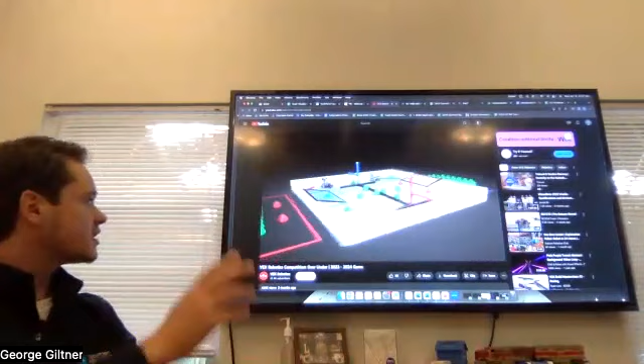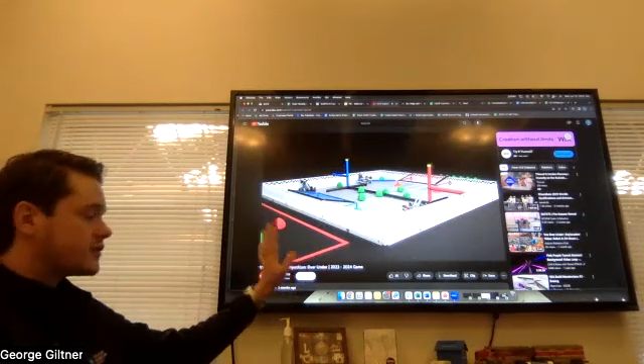You'll want to watch this video with your students at your first practice. This is Vex Over Under, played on a 12 by 12 field. You've got nets on either side, and a dividing tube down the middle. These things are called tri-balls, there's 60 of them on the field. They're going to be green, but each set of teams will have 2 red for the red alliance and 2 blue for the blue. So unlike IQ, where there's only 4 robots or 2 robots on the field, in VRC there's going to be 4. You'll have the blue and red alliance, a blue scoring zone, a red scoring zone, and that divider down the middle.

Like high school, you'll have an alliance partner where you're working with them to score as many points as you can. But you'll also have the other alliance, where you're kind of competing together. We call it coopertition — you're cooperating with your partner but competing against the other set of partners. We'll dive into what each part of the scoring looks like in the PowerPoint.

They're going over the do's and don'ts of the game and where things are on the field. For example, robots can only hold one of these tri-balls at a time. There's a loading stage — we'll talk about that — and those are on the corners of the field. But at the end of the day, the point of the game is to score as many points as possible compared to the other alliance.

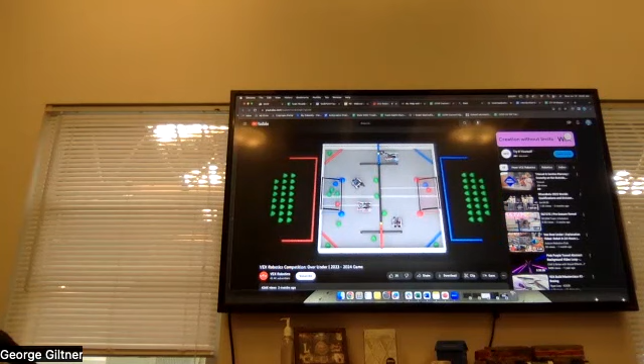There are multiple ways to score — you get points for scoring underneath the net score zone, and toward the end there's a pole you can climb, which I think is interesting as kids try to engineer different solutions. There's also an autonomous period, which we'll break down here. I'll encourage you to watch this video with sound when you get the chance to watch it with your students, but we're going to break down everything in the video.

Robots can go underneath this bar to the opposite side. You'll have a red scoring zone, a blue scoring zone, as well as those nets. Like I said, whoever has the most points at the end is going to be the winner.

As time expires, there's kind of a last chance to get points, and that's where these bars come into play. The way this game works for this year is that the robot that's highest wins the most points, and it scales down from there. So there's a hanging bar — they have this pole that dictates the height of the robots as they hang, and the points are allotted based on what that hanging looks like.

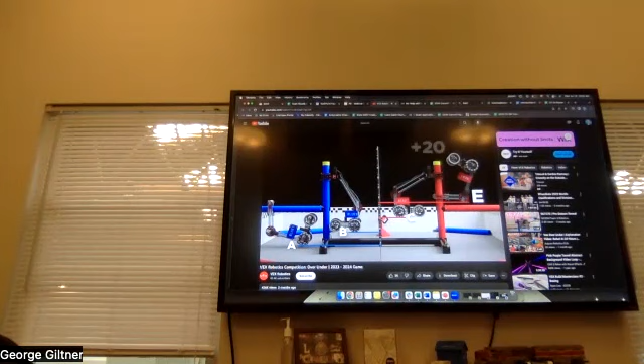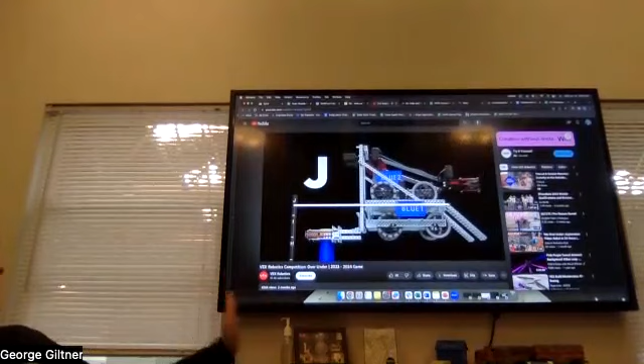So you'll see students come up with crazy ways to hang their robots, and we'll see what judges do for robots that are very close together. But that's kind of the structure of what these games look like.

I'm going to pause here and talk about the last bit of this video. On top of your competition, where you work with your alliance partner competing against the other alliance, there's also skills — basically one robot on the field scoring as many points as it possibly can. Typically at an event, and George will talk about this later, those are off to the side. So if this was like a high school gym, you'd have the fans over there, the competition fields right here, and skills might be back in the corner.

The way we invite teams to the state championship is by skill scores throughout the state. So skills is very important, especially if you have students whose robot doesn't mesh well with other robots, and maybe they get bullied a little bit by the more well-built robots from teams that are more established. So I'd encourage you to do those skills as well.

Any questions so far? I'm sure you have a ton of questions about the game. There's just one right now.

Biz asked what parts are included in the grant for those who received one, which I think we cover later — we do cover it later. To put your mind at ease right now, we'll cover the field, not the tiles — so the field, game elements, and your robot kit. Everything can actually be purchased from Vex. We purchase the kits, and I'll put all the links in the chat.

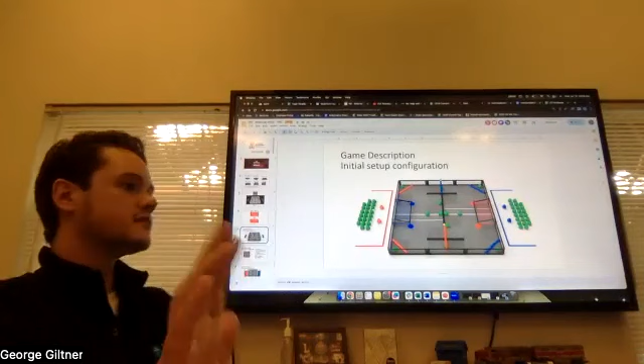Again, your students are going to have questions about the games. You guys have too much on your plate. You don't need to be reading through 113 pages, make your kids do it, they'll know all the answers. But as you can see, it kind of talks about the game, what each aspect of this field looks like, some definitions. Make your kids read this, you do not need to read this. George and I don't even want to read this, and we do VRC more than you guys do.

IQ is like a 30 to 40 page manual. Yeah, you go with the VRC, it's over 100. So there's just a lot of details, and it just comes because each team really tries to find ways to bend the rules, and they just keep having to make them bigger and longer. And what you'll see in there even outlines that at different dates in the season, they'll update the manual because of the loopholes teams find out. So they'll be like, oh I never thought about that, and so they've already made some iterations.

Yeah, it's called a change log, page 4. So you can kind of see they've already, looks like they added a new violation. So as your kids are becoming experts at this, they'll need to go to the change log, see what's new for the month of June. And actually it looks like they've added multiple violations. So kids have already found ways around the rules and they update this.

I don't know when the cutoff for the update is. So if you make it to state, your kids aren't going to be needing to read this right before state. It'll go all the way to Worlds, updates all the way up right before Worlds. I take that back then, they will need to be reviewing this up until their competition at Worlds.

But like I said, your kids will need to read this. You can print it out if you want. I would suggest not printing it out just with these updates, or you can print out everything but the change log and have the kids check the change log online periodically.

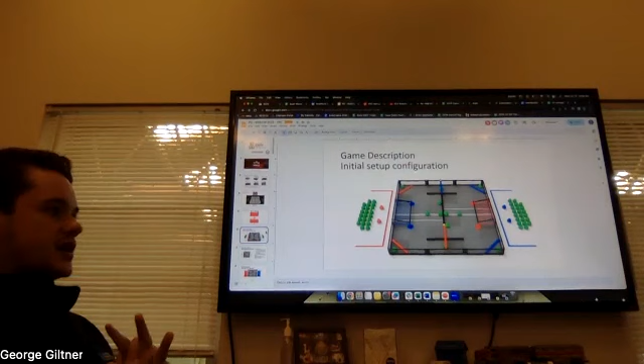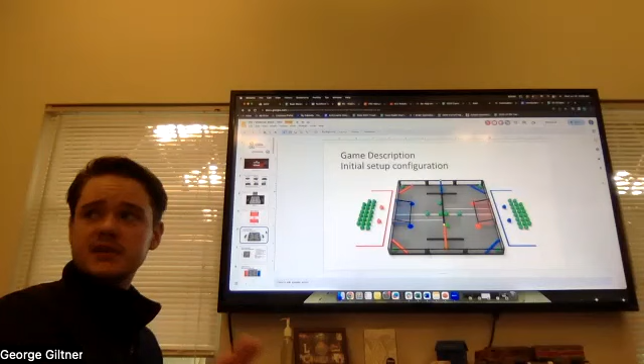All right, so the game. Again, the video does a good job of showing what it looks like for robots to move around, because it's really unique to see four robots move around a field. So again, I would encourage you to watch it. There's also tons of videos on YouTube of really gung-ho teams that have already built their robots, have already set up their fields, and have already started practicing. Again, you're not behind, there's no expectation that you do that, but I would encourage you to go watch those videos to see what it looks like for these robots to be moving around.

But this is the field. I think it was called Over Under. Yep, Over Under, nailed it. And we'll talk about what each scoring looks like and what the field looks like. But you have a red and a blue side. You can kind of see the field, the goals are switched. So this is the red side with the blue net on it, and this is the blue side with the red net on it.

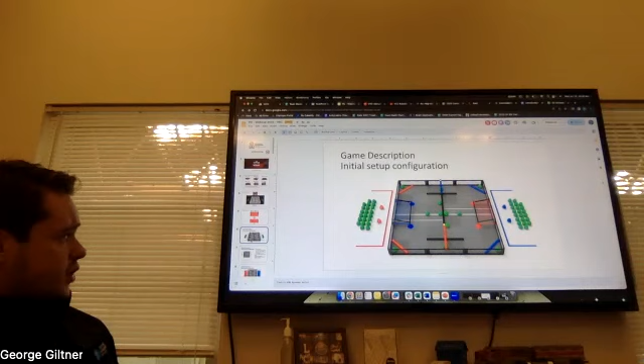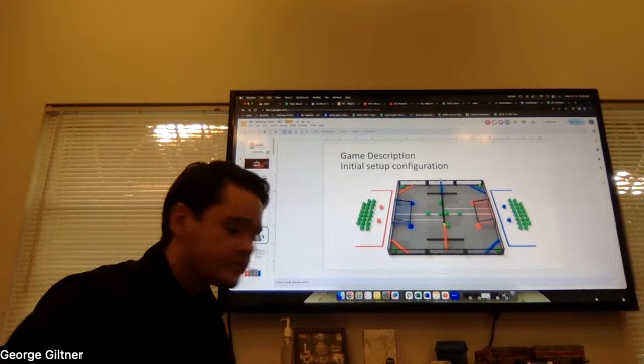You'll have 60 balls. It starts with 12 balls on the field, and then you'll have loading balls that your alliances will put up in the corners. We'll talk about what that means as you load those triballs onto the field. But like the video showed, the point is to move those balls around the field and score them. We'll talk about what that looks like here in a second.

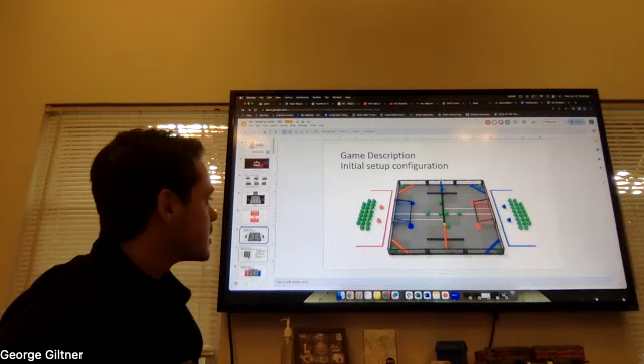So like I said, you've got 60 of those balls. You've got 4 of those alliance triballs, which are going to be kind of the ones at the front. Here, this picture is a little bit better. You've got 2 designated red and 2 designated blue. We'll talk again here in a second why those are important, but those can only be scored in very specific areas. You'll have 44 that are match loads, so these are kind of what these look like over here, which means that as balls are removed out of these corners, teammates can put balls into that little triangle.

This year that's new, I think you can have a third person on VRC. It used to only be two drivers. You can now have a third person, and the suggestion is that you utilize that person as the loader.

You have 12 that begin on a field. There are 2 sets of elevation bars, one per alliance. You saw that in the video. It's where you have the blue right here, the red right here. It's where those robots are going to hang. You've got 2 goals, again one per alliance. And you've got those load-in bars, those load zones, which are outlined by those colors. So that's just an overview of the field.

We give you all of those balls. I don't know if there are any extras. I know for last year's game, especially for IQ, there were extras. Find a way to keep track of them because they're not cheap, unfortunately. You can buy extras, but they usually sell out pretty quick. Yes, so I would make sure you keep that. They will get beat up throughout the year, so it's not uncommon that some will break, but do your best to keep track of them. I know you're adults and responsible, but don't let your kids wander off with them.